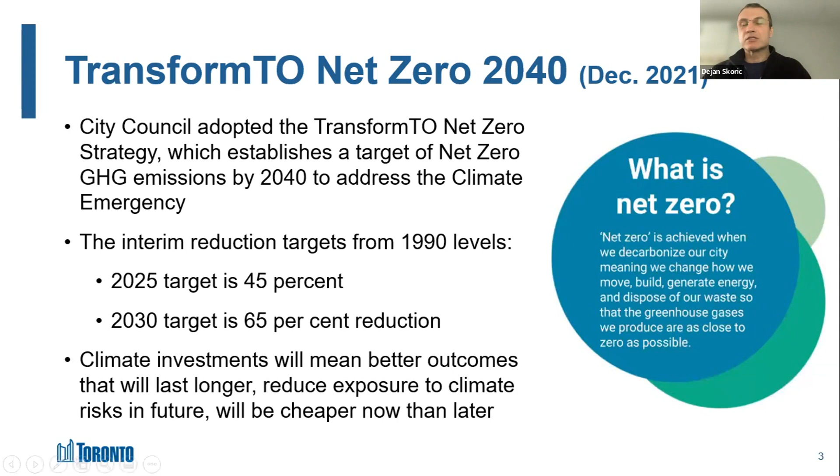So for the City of Toronto, what does it mean? On the next slide, you can see on the graph that essentially it's not business as usual. We did run a number of scenarios on what's needed to get to net zero. We realized that business as planned, like achieving the 80% reduction by 2050, would not get us anywhere close to net zero by 2040. So we need to do much more than we planned to originally.

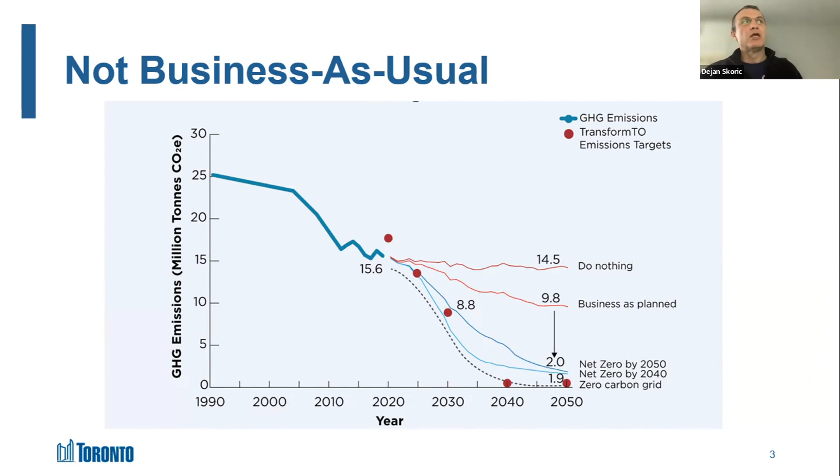And on the next slide, we can see that because of where the greenhouse gas emissions in Toronto are coming from, it's mostly from buildings and transportation. Those are the two major sections of society that we're going to be focusing on. And my portion of the presentation will be focusing mostly on buildings, and then we can tie in with the EV later on.

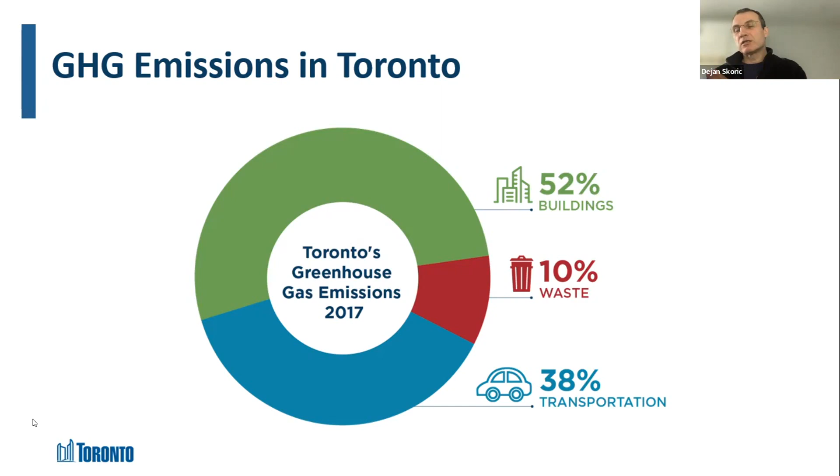So on the next slide, we are addressing the buildings section by looking at new construction. The City of Toronto is trying to address that through the Toronto Green Standard. We have been doing this since 2010, and design requirements are being established. We are now at version 4, starting from last year. And what's new for the current version is that we added more stringent requirements, especially related to emission reduction, embodied carbon, as well as green infrastructure targets.

So on the next slide, just briefly, TGS is comprised of 3 different sets of standards. Low-rise residential Part 9 type of buildings, and then the second, most used part of the standard is for Part 3 type of buildings. And then we have a separate standard for city-owned, municipal-owned buildings, which tends to be more stringent. It's equivalent to Tier 2 of the Part 3 TGS standard, or more stringent than that.

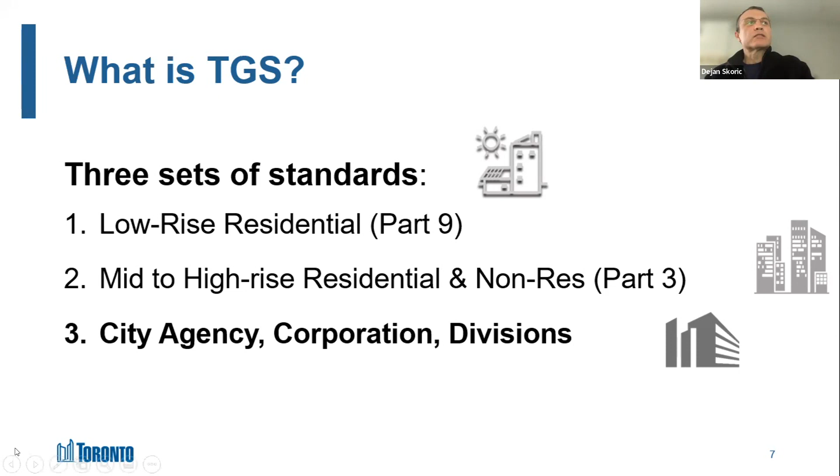So on the next slide, while we will be focusing in our presentation mostly on the energy and emission side, as well as the EV ready requirements, I just want to point out that TGS does try to encompass the whole building and the building site. So it does cover ecology, water efficiency, and circular economy, in addition to the other 2.

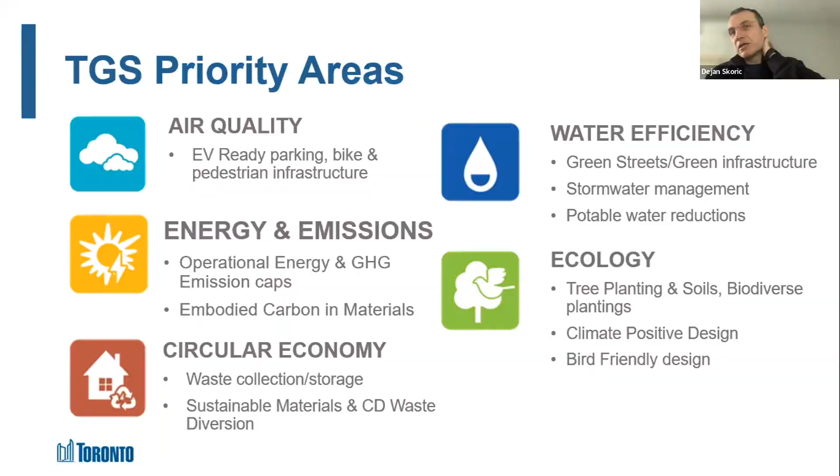So on the next slide, on advancing net zero, the goal is to advance it, to try to do it earlier, to act as a market transformation tool, to be at least 1 step ahead of Ontario Building Code requirements, or actually I think we are a couple of steps ahead of the Ontario Building Code.

So on the next slide, you can see that we are doing this by establishing clear tiers, clear steps and a clear timeline when those steps must be achieved. So at version 3 in 2018, we had 4 tiers, and each new version of TGS takes out the bottom tier. And by the time we get to TGS version 6 in 2028, 10 years since it was established, what used to be tier 4 under version 3 becomes a mandatory near zero emission standard. We did the reference building comparison, and we can look at TGS version 4 compared to the Ontario Building Code.

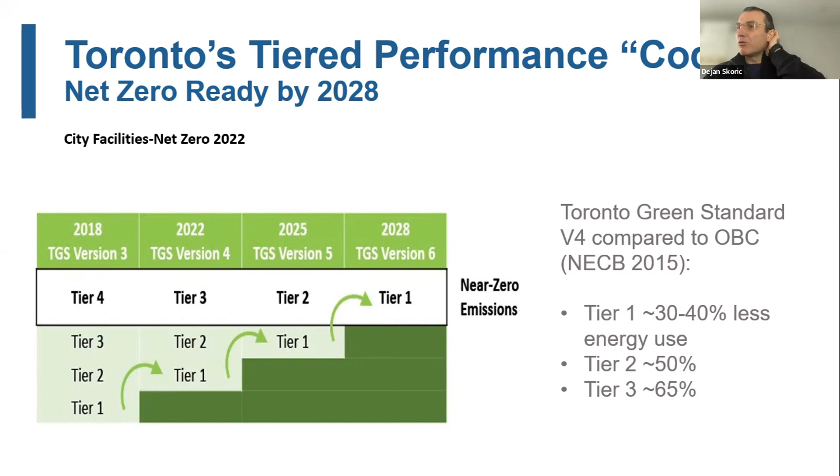The tier 1 requirements are about 30 to 40% depending on building archetype. Tier 2 is roughly 50% better than code, and tier 3 roughly 65% better than code. So on how we are managing, on the next slide, we are looking at both metrics on the energy side and the greenhouse gas side.

On the energy side, we are trying to look at the total energy use intensity as well as the thermal energy demand intensity. And you can see on the table that as the tiers are more progressive, those numbers are more stringent and lower. So it gets a little bit more complicated. It gets a little bit harder to achieve them, but it's not outside the realm of possibility. And it's very clear where the requirements are.

So everybody who is building now knows that in 2028, what is listed now as tier 3 will be a mandatory requirement, and you can hopefully plan for it and design for it in time. Just want to point out that in this pyramid as well, TEUI and TEDI are really addressing the bottom two parts, where we are aiming to reduce the energy loads through passive design, and then looking into improving the efficiency of mechanical systems, which now can be much smaller because you have reduced the energy loads through passive design.

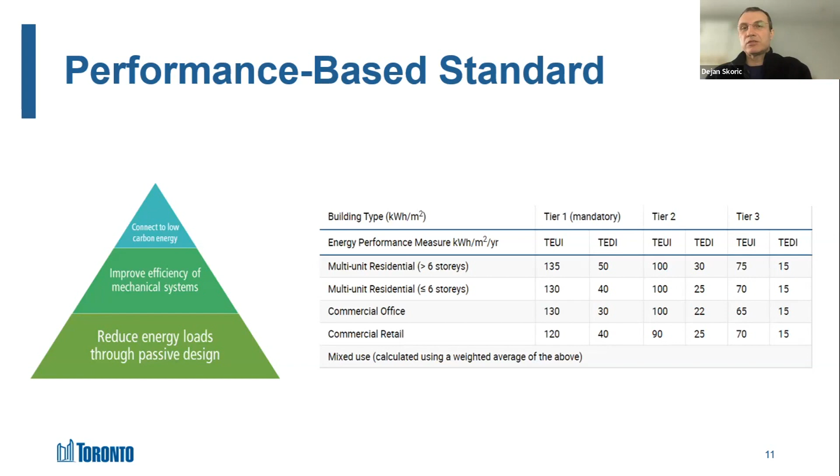Also, those buildings tend to be more resilient to extreme weather events, and in general more comfortable for the building tenants or users. So the next slide, the third one that we are looking into is the greenhouse gas emissions target, and that's the top of the pyramid. Really, we are looking into the energy that you use that you cannot generate on site by yourself, like using renewables. Then the aim is to connect to low carbon energy.

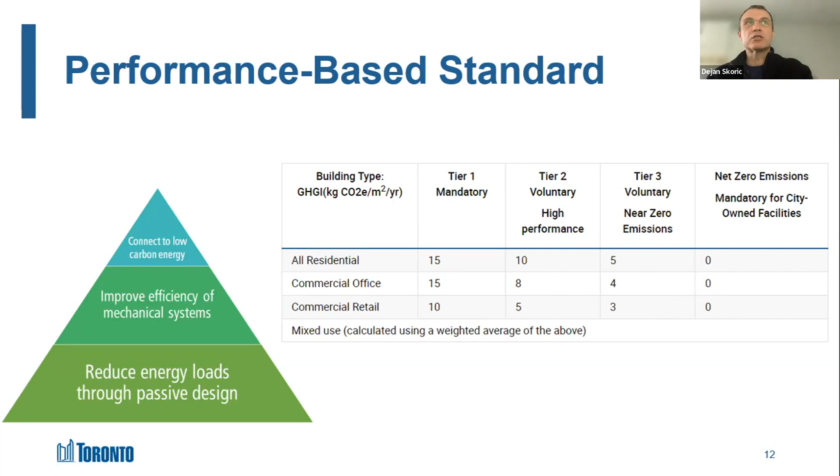The next slide. The new thing that we added in TGS version 4 is we started looking into embodied carbon from building materials. And on the next slide, you can see that right at the moment, it's only for tier 2 and 3. It's required for city buildings, but as tier 2 and 3 are voluntary, it's voluntary for everybody else. It requires the life cycle assessment and looking into embodied carbon in the major building materials, typically structural and envelope materials. As I said, for the city buildings, it's mandatory to do this, and then there is an optional target to try to reduce it 20% below the baseline.

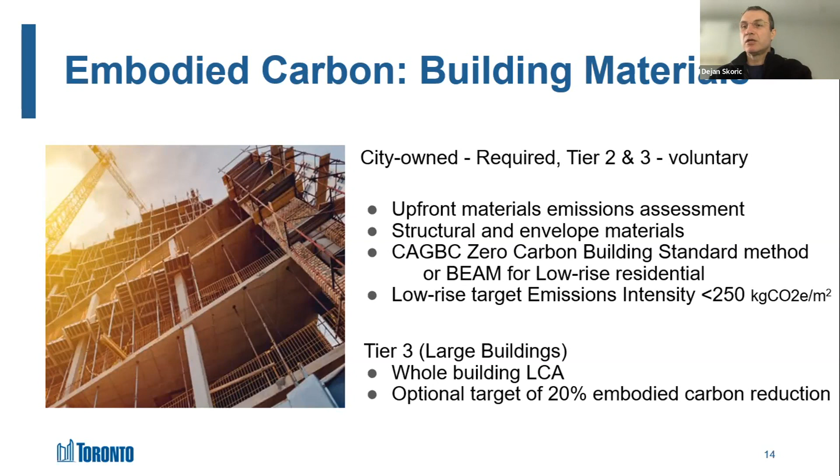On the next slide, you can see in the meantime, over the last year, with help from TAF Toronto and consultants that we hired, we looked into the embodied carbon emissions of the various typologies of buildings and what is currently used in real examples of buildings that were recently built or designed in the Toronto area, with the goal of eventually putting potential caps on embodied carbon, and possibly doing it in a similar step code, the same thing as for TEDI, TEUI or GHGI. We may have something for embodied carbon similar to that.

There will be a council report because council asked us to do this. So city planning will be going to council probably in May, providing the report with some recommendations attached to that. And I guess once it's public, then we'll know what's been decided or proposed to council to look into establishing those targets.

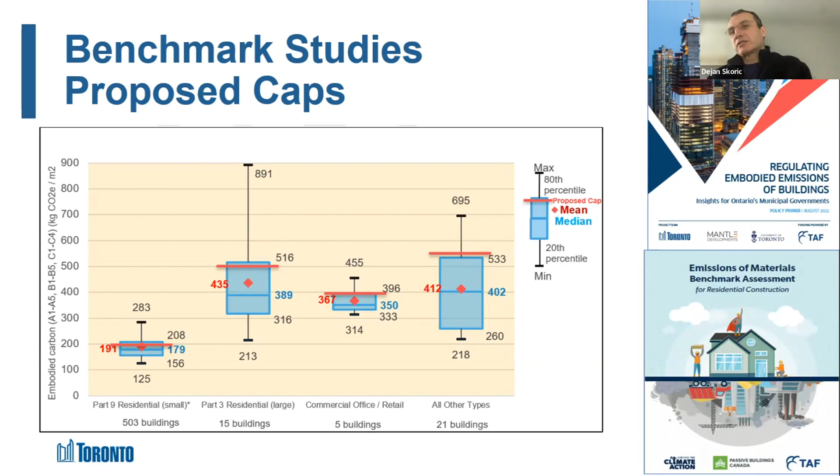The next section I'm going to look into is, again, trying to say that we are trying to walk the talk, and that the city is also trying to look into our own emissions and reduce them as much as possible. So the next slide just shows, for all the city agencies, city-owned corporations, and our divisions, where the emissions are coming from.

And you can see that the majority of emissions are coming from buildings and transportation. Obviously, TTC is a major part of that because of the diesel buses that they're using. They have a plan that's already adopted to transition to e-buses. So that big green section is going to be reduced over time, very quickly over the next decade.

On the other hand, the majority of our heating, that's the red under the building section, is coming from use of natural gas for the heating of space and water. So that's the section that we want to work on reducing.

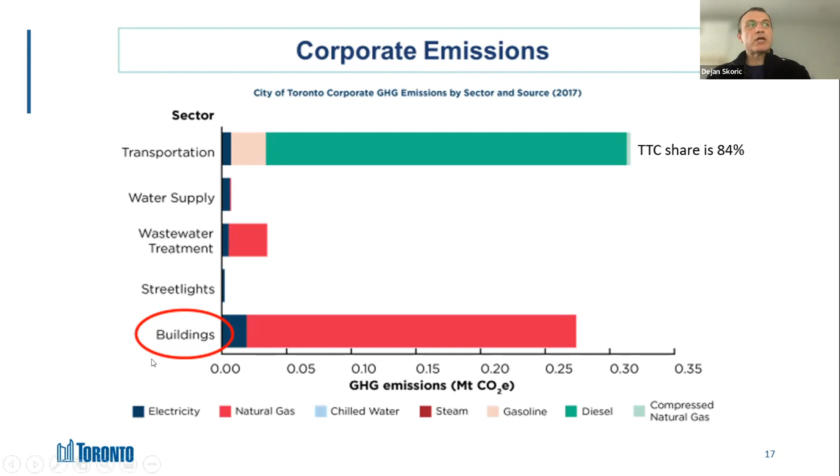And on the next slide, on TransformTO, which is our strategy to get to net zero, there's a separate section of targets, we call them leading by example targets, where council said by 2030, this is what city operations must do. And some of those targets I just highlighted: we have targets on transitioning the city fleet, both buses and other types of vehicles that we use. At least half of them need to be transitioned to zero emissions vehicles. So that ties in very much into the EV charging requirements.

But on new construction, starting last year, all new city buildings had to be designed to net zero. And starting this year, council requires that all new equipment installed in existing buildings must also contribute to net zero.

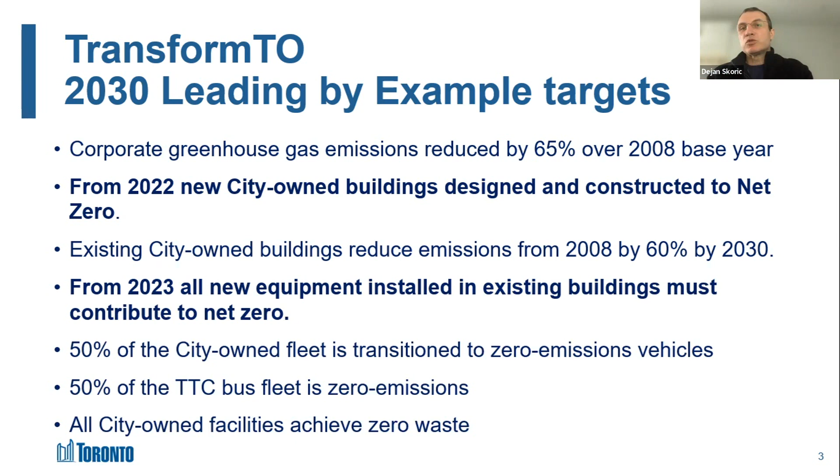So on the next slide, in TGS version 4 for the city buildings, on the emission side, so again, this is TGS for the city buildings, we have GHGI equals 0. That's a requirement. And on the energy side, we have offered 4 different options to meet. The first one is pretty much meeting tier 2 of the Part 3 TGS.

And the other 3 options are really there to help, because a large majority of the city-owned buildings do not really fit into regular archetypes that are typically built in Toronto. They're typically uniquely municipal types of buildings, so we don't really have an archetype. So we had to offer a little bit more flexibility on how to meet that. And you will see in some examples why that was offered.

But we have some examples as well, so you can see on the next slide, we put it in leadership by doing, we try to practice what we preach. So we already have 2 buildings that are in construction. Mount Dennis Childcare Center, which will be our largest childcare center in Toronto, will be finished this year. Northeast Scarborough Community Center is under construction and will be completed by the end of next year.

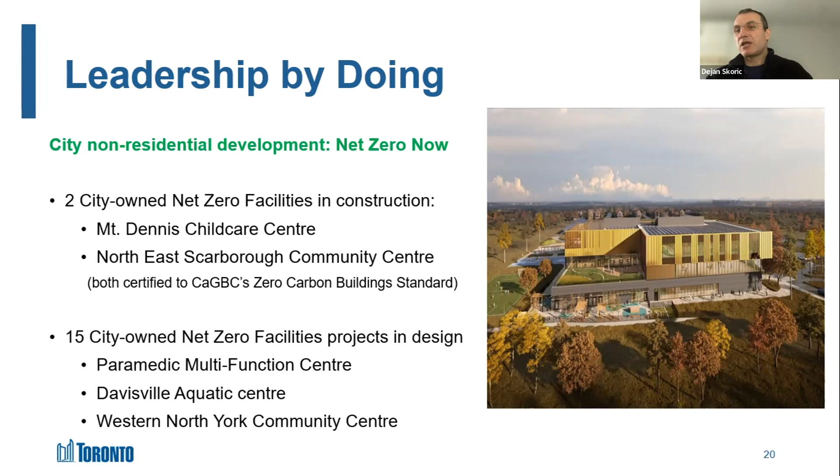I just want to highlight the Davisville Aquatic Center building, because some of our buildings are typically low rise, and if they're big and not shaded, they can actually get to net zero energy as well and offset their carbon emissions by producing renewable energy on site. This one cannot do that.

This one is midtown, it's fully shaded. There is absolutely no way that we should put any solar there. It'll be completely shaded by the buildings to the south and west, and it wouldn't make any sense. So instead of putting solar, they put an active roof in the design. So they use the roof for programming, for activities, for community. There'll be community gardens there as well.

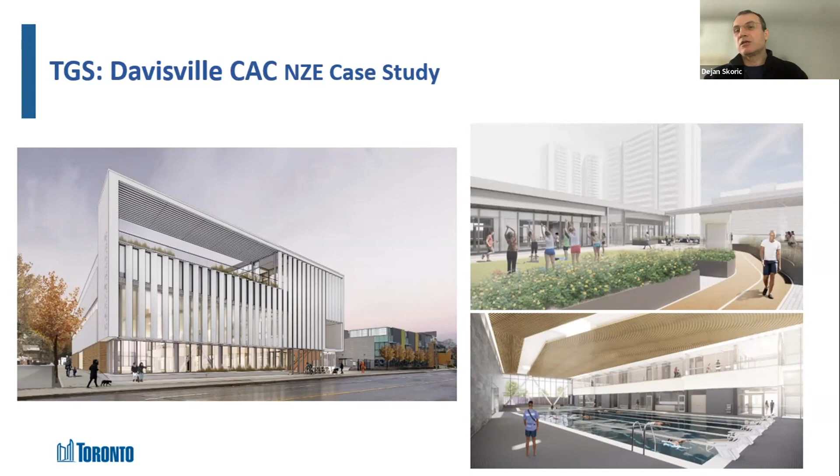So they did achieve near net zero. We would have to either have offsite renewables or purchase carbon credits at the end of the construction or at the end of 2040. But we felt that because of their unique situation, they've really focused on electrifying the building

and reducing TEDI as much as possible by utilizing as many passive design strategies, building very compact, paying very close attention to massing, orientation, glazing, air tightness testing. As well as thermal bridging. They were really focusing on that.

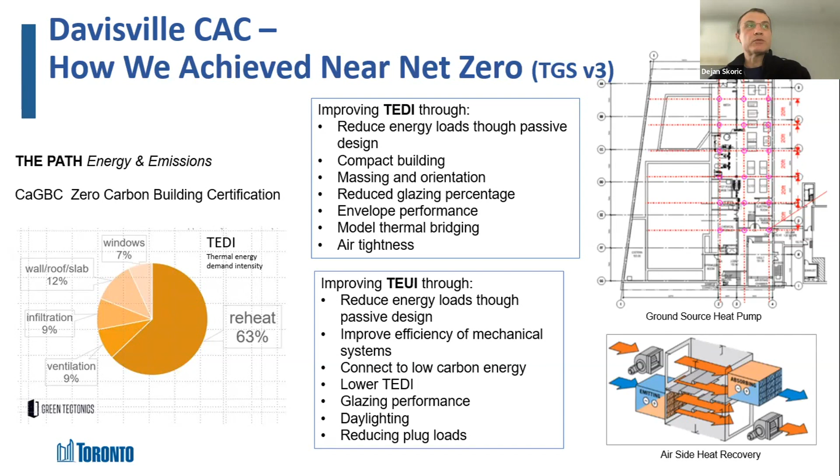In any case, it's a very efficient building, and it's an electrified building. It's ready for net zero, and the only emissions associated there are coming from the grid use. So hopefully, as our grid over the next decade gets cleaner, this building will actually become net zero. And if not, then we will have to deal with that with the carbon offsets.

So the next slide, just want to shift a little bit here. We did a couple of embodied carbon studies already on the buildings. This particular building is going to be a net zero building. They also did the embodied carbon study fairly late, because this is a slightly earlier design, so it was going through version 3 of TGS before the embodied carbon target requirement was introduced. So we still went through the embodied carbon study to see where we are.

That building, because they were trying to make it more sustainable, already had a fairly low baseline for the upfront carbon. But through the study, they identified a few other reduction strategies, and the top 3 that have the most effect are the ones they also committed to, refining their design. It was already in detailed design stage, but they were able to refine it by specifying lower carbon concrete, lower impact insulation and the concrete sealant. Those 3 changes avoided over 800 tons of CO2 in the manufacturing for this building.

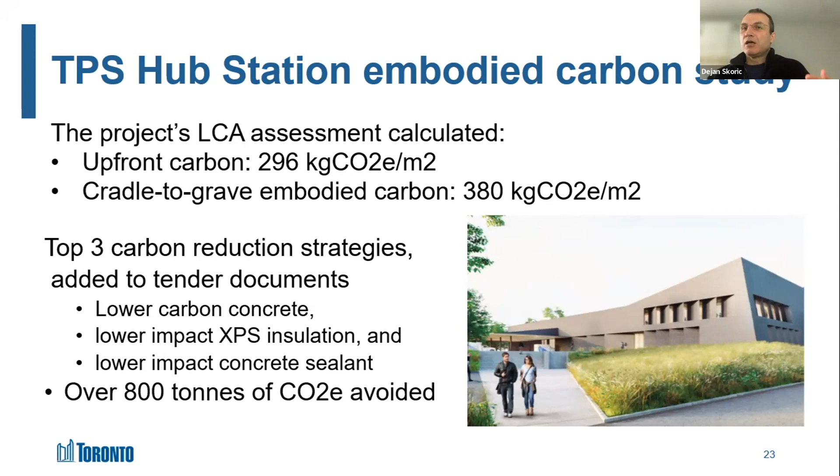So focusing on passive measures first, minimizing parking as much as you can, especially underground parking, because that is where the majority of embodied carbon comes from. In some cases, like 2/3 of embodied carbon comes from a few floors of underground facility versus 20-30 floors above ground.

If you can use geo-exchange systems, because of the efficiency and lower energy use, you also get some mechanical penthouse space that you can use for an active roof, like we see in Davisville, or for solar PV as well. And on materials, again, specify low carbon concrete, avoid high embodied carbon insulation and aluminum, for example.